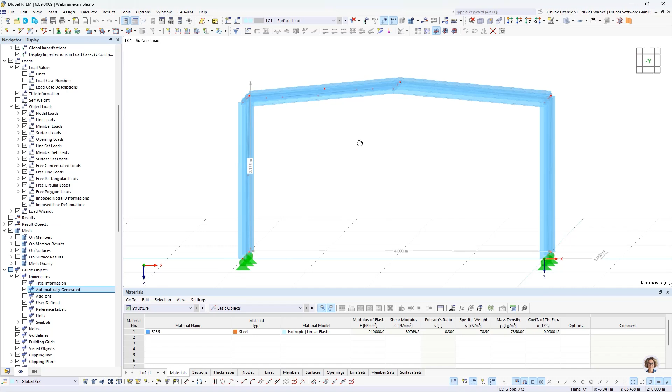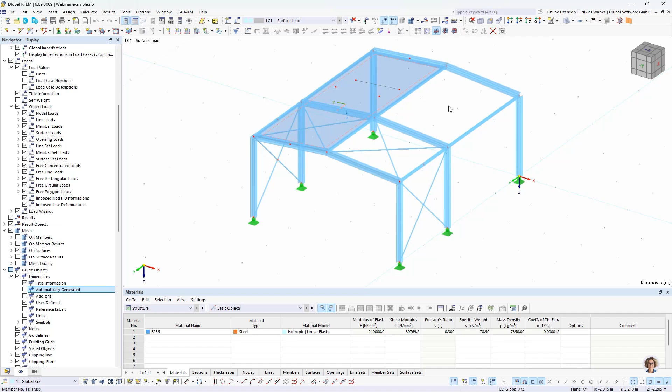As you can see, I already created one surface of one half of the roof, and this is already a load transfer surface. For the second half of the roof, we will model this surface together so that you can have a look at the process of modeling it.

For that, I will choose the option New Surface with the option Select Boundary. Now we are in the surface dialog, and first of all, we have to select our stiffness type.

So this is where the magic happens, because here you can select the load transfer surface, and that's exactly what we want for this webinar.

An alternative would be to select another stiffness type, for example standard stiffness. Then you can create your thickness and your material. In this case, it would be possible to activate the option Activate Load Transfer, where you can consider the stiffness of the surface but also do the load transferation.

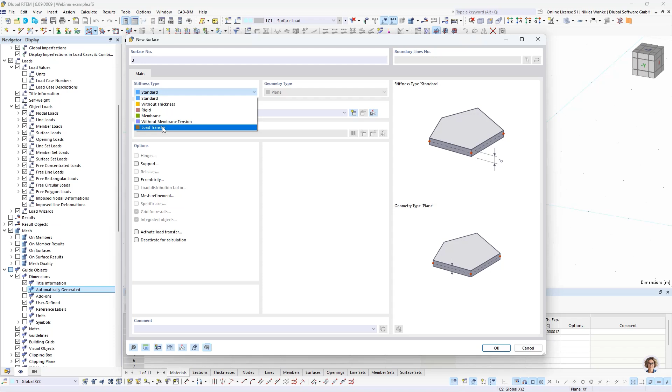But for this example, I would like to choose the load transfer stiffness type, which means we don't apply any stiffness to the load transfer surfaces, just do the load transfer. As you can see, this option is automatically activated in this case.

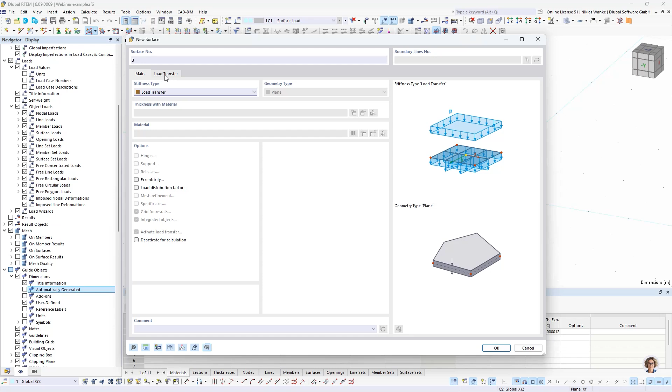Okay, by choosing the load transfer stiffness, we get an additional tab, and this is where we can make all our settings for the load transferation.

First of all, we want to have a look at the categories area, and the first setting is really important. This is the load transfer direction, and basically we offer two different methods of load transfer for the surfaces.

The first method is called isotropic FEA, and the other method is called the stripes method. These two methods work completely different, and we will have a look at both.

But first of all, let us select the isotropic FEA method. I want to give you a small explanation about how this method works, and for that we can have a look at this picture at the bottom right of the dialog, because in this picture it tries to explain how this method works.

So this first picture is what you see in the main model. You have your load transfer surfaces, you have probably a connected member or other connected objects, and you have your applied load. In this case, it's a surface load.

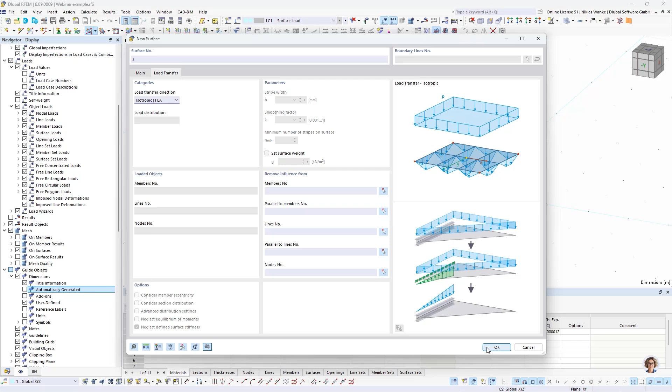But first, let us finish the creation of the surface. So I apply by pressing OK, and then we have to select our boundary lines so that the surface will be created. So that is done.

And now, of course, we also have to apply a load, because without load we would not see anything. Therefore, I create a new surface load. I want to have a load magnitude of 1 kilonewton per square meter to keep it simple, and the load direction should be in global Z on projected area.

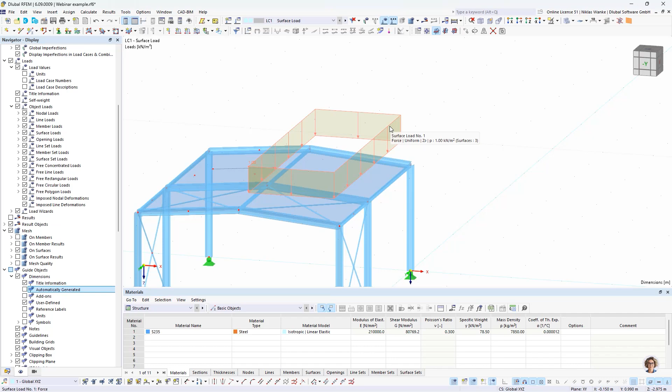We can apply this and select the loaded surface, which should be the right load transfer surface of our roof. Okay, now we see the defined surface load, but that's not the visualization or the load that we want, because we want to transfer this load to the connected members.

And to see how this load is transferred, we have to change the visibility a little bit. So we will go to the navigator display, and you will find the setting under Model, Surfaces. Then you can see there's the option Loads from Distribution Surface.

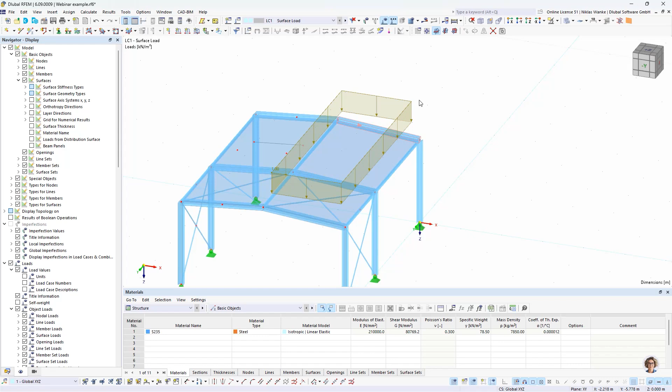And if we activate this option, then we will already see the distributed or transferred loads and not the surface load that we can see at the moment. So I will activate it. And okay, we don't see anything.

Why is that so? Because the submodel, which I talked about, has not been calculated yet. So to start this process, we have to start a calculation of this load case.

As soon as I start the calculation and the solver starts, you will see that there are two separate calculation processes. That's a hint, because the first calculation process is made for the submodel, and after that we do the normal calculation process for our main model.

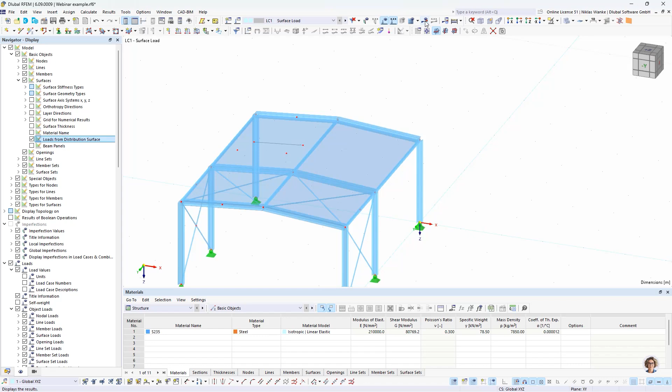So I hit the calculation button, and as you can see, now the mesh is generated for the submodel, and now the static analysis is done for the submodel. If it's finished, we should see loads.

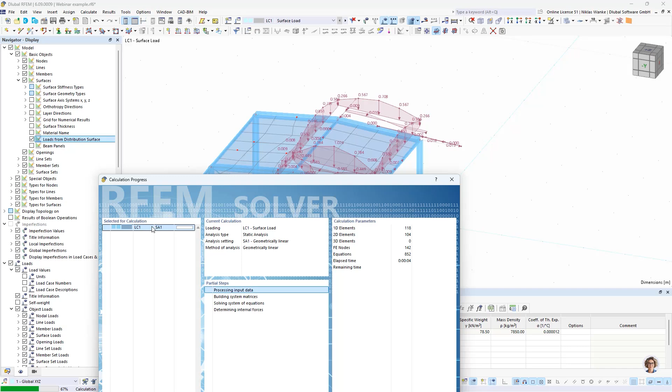That's the case now. And now the mesh is generated for the main model. And now the static analysis is done for the main model, and after that we will receive our results for the main model.

So I think it's clearly visible in the solver that the submodel has to be calculated first, so that we receive these transferred loads.

In this case, also my horizontal bracing has received some loads, and probably that's not the thing that I want. But that's not a problem, because we can simply deselect these members to be loaded.

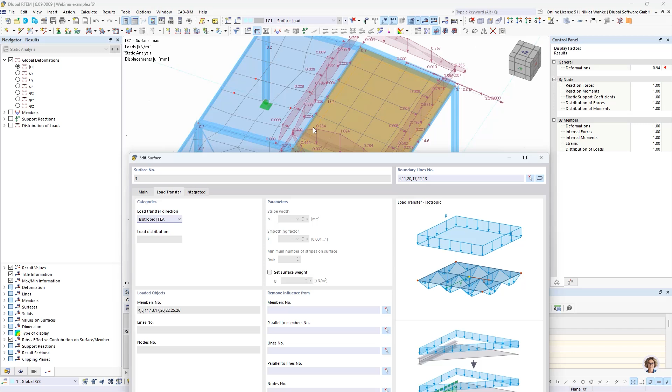For that, we go back to the load transfer settings. Here we can select in the middle part of this dialog which objects should be loaded. By default, all members, all lines, and all nodes which are part of the surface, so these integrated and connected objects, are all loaded by default. But we can remove the influence of some of these objects.

For example, I will choose the members of my horizontal bracing. And by clicking OK, we of course have to calculate again, but then these members won't be loaded anymore.

It's also possible to select one member and all members which are located parallel to the selected member, and then remove the influence from all these parallel members. Same is true for the lines, parallel lines, and for the nodes.

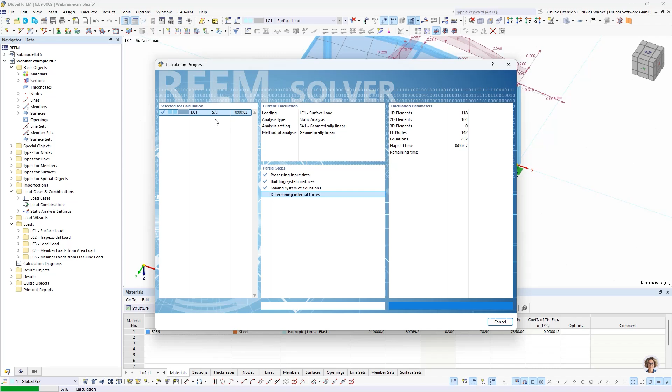Okay, let's calculate this again. Here we see again that it's calculated two times: first time for the submodel, and second time for this steel hall model. That was the first time, and now the steel hall is calculated. And now it's finished.

Okay, so now we received our transferred loads. I can also switch back to the original load, which is the surface load, and switch back to the transferred load. In this case, we only have member loads.

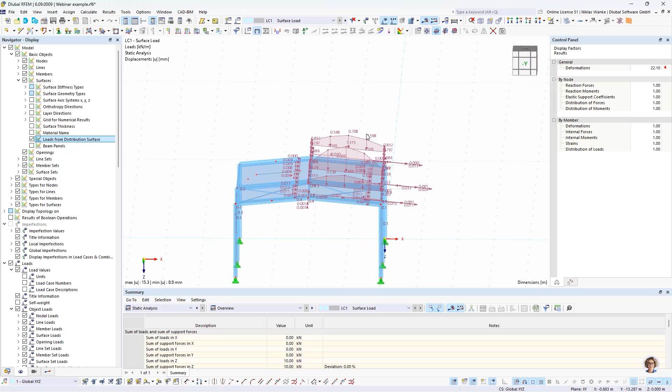The main load is a vertical load as expected, and we have some small effects which result in horizontal loads, but most likely you don't have to pay any attention to these loads because they are really small, like 0.001 or 0.02.

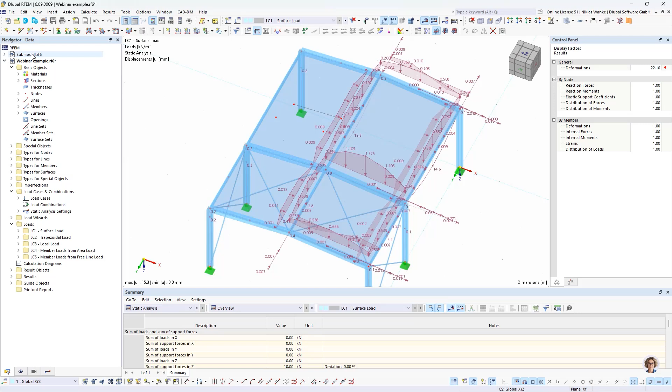Okay, I would like to show you the submodel as well, and I prepared this in a separate model of RFEM6. So I just created the submodel of this one load transfer surface. As you can see, we also have the roof pitch, and we have the surface load on the surface.

And in this case, the members, as I said, are now modeled as fixed supports. The definition of the surface is a bit special, so it's not a complete rigid surface, but a surface with the stiffness type standard and a defined stiffness matrix.

So let us have a look into the stiffness matrix. We will see that the different stiffness coefficients are set to a relatively high value, like 1e+10 or 5e+9, or maybe here also 1e+11. So this is a really high stiffness, but it's not a complete rigid surface. It still has a finite stiffness.

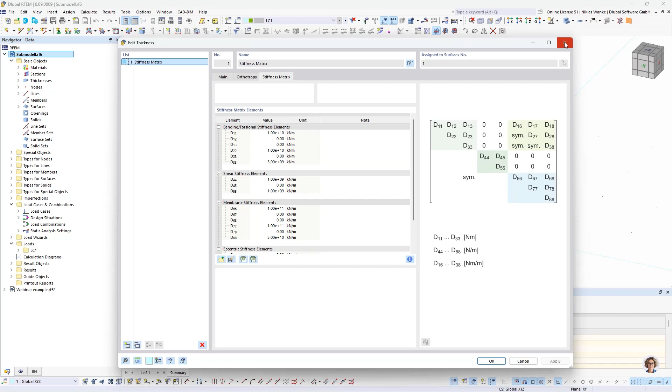The reason for that is because this leads to a better result, or a better load distribution. So that's why this load transfer surface is set to this stiffness in the submodel.

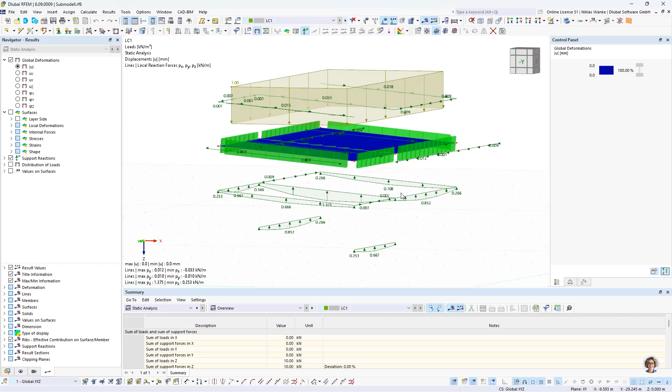And if we calculate the system, then we will receive the support reactions of these fixed supports, and this will be exactly the load which is applied in our main model. So for example, we can remember this value here, which is the peak value of the middle rafter.

So in this case, we have 1.375 kilonewton per meter. And if we switch back to our main model, we will find exactly this value, which is 1.375 kilonewton per meter. So yeah, with that, I think we have proved that it is the same.

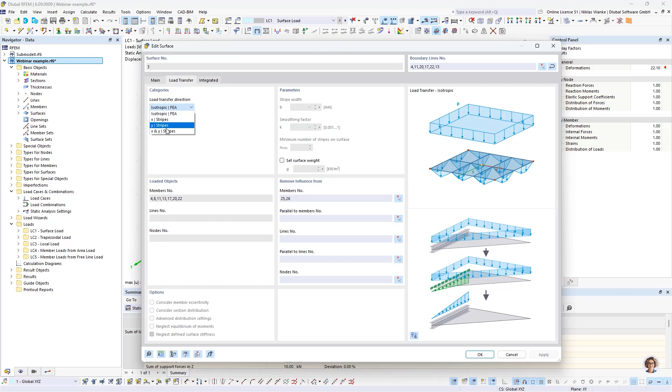Okay, so let's go back to the definition of the load transfer surface. And this time we will have a look at another method, which is the stripe method.

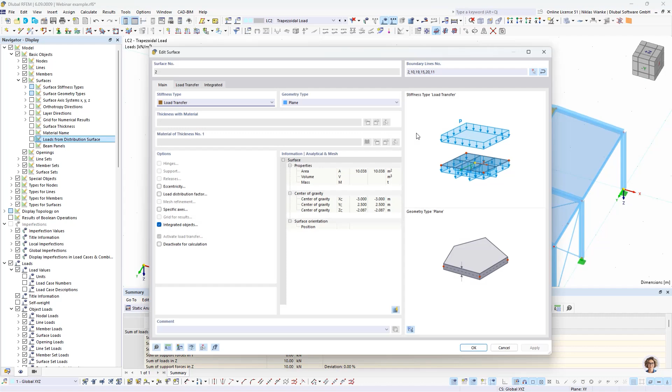Therefore, I will go to a new load case, which is the second load case. And here I defined a trapezoidal load for the left side of the roof. Let us have a look at the load transfer surface, which I have already defined.

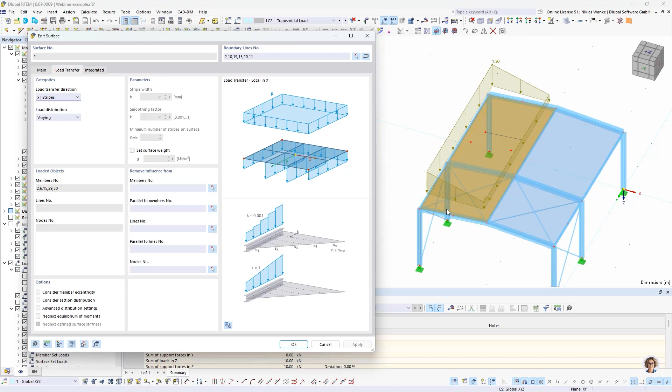So we go back to the tab load transfer. And in this case, we see we have defined X stripes. And this means that the surface, which we see here, is divided into many, many stripes along its local x-axis. So if we hover over with our mouse, we can see, okay, the local x-axis is located in this direction. So it means that the surface will be cut or divided into many stripes, like I am showing with my mouse. So in this way.

So you can imagine, like, if there would be many single beams which are lying in this direction on the roof. And every of these beams or every of these stripes is loaded with this trapezoidal load. And always if such a stripe cuts a member, like for example these rafters or also the horizontal bracing, then these members will be loaded by the stripe.

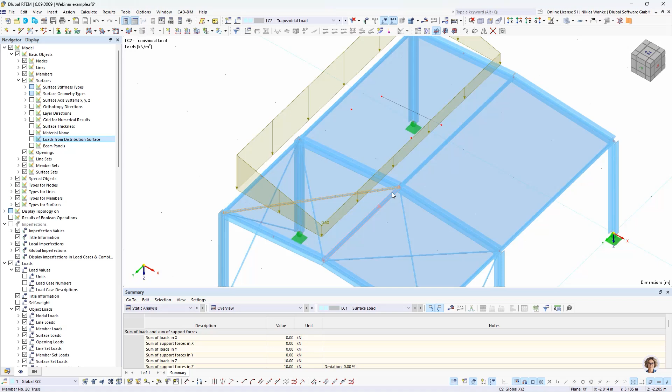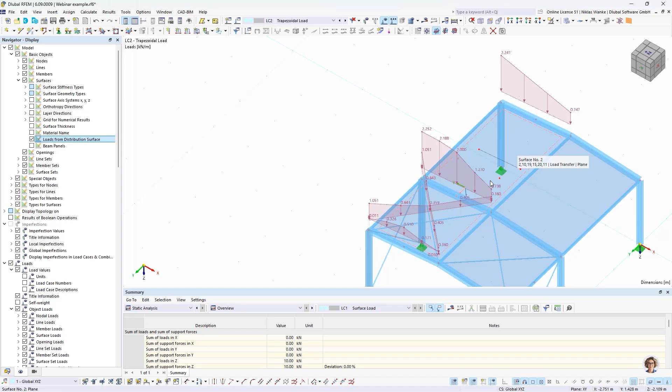So I will go on. No, I will first of all select the loads from distribution surface so that we can see the result of the load transfer. And as we see now, okay, the horizontal bracing is also loaded and our rafters. What is not loaded is the purlin of the rim and of the middle. And the reason for that is because the purlin is completely parallel to the stripes direction, so it does not receive any load. If we change the stripes to Y stripes, then of course the purlin should be loaded and our rafter should not be loaded anymore.

So I will change it and apply. And now we see, okay, the purlin is loaded, but rafter is not loaded anymore. So these are the two options that you have to divide the stripes in X or Y direction. And the third possibility would be to mix these two stripe directions. So in this case, you have X and Y stripes. It's basically like a mix of the two methods. So if we select it, you will see that now all members, regardless of their direction, are loaded.

Another option that comes with the stripes method is the load distribution. Normally it's set to varying, but it's also possible to set the load distribution to uniform, and in this case you will always receive a constant load distribution on any object. So if I set it to uniform, we will see that this linear load distribution will change to a constant load distribution. In some cases, this can be an advantage to keep the system a bit more simple. Maybe also to prove it easier if you calculate it by hand. But of course, the load distribution varying would always be the more exact method. Okay.

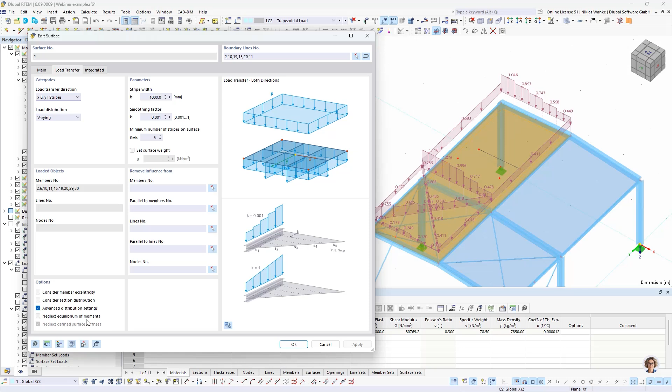Okay, and one last option is the option neglect equilibrium of moments. By default, the setting is deactivated, which means that the equilibrium of moments is considered. And I can show you that in my third prepared load case. And here I defined some local loads on our load transfer surface. I have two nodal loads. I also have a free line load and a free rectangular load.

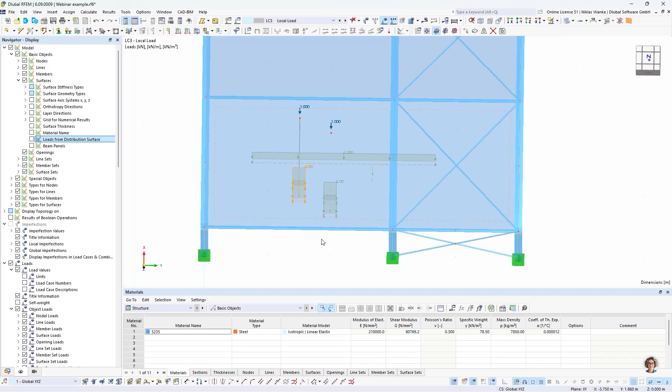This could happen if we have, for example, air conditioning on the roof, or if there are some pipes which are connected with the roof. So this could be cases where we have such types of loads on our roof. And of course, it's also possible to transfer these loads which are applied on the surface to the connected objects like these members. Normally, the equilibrium is considered.

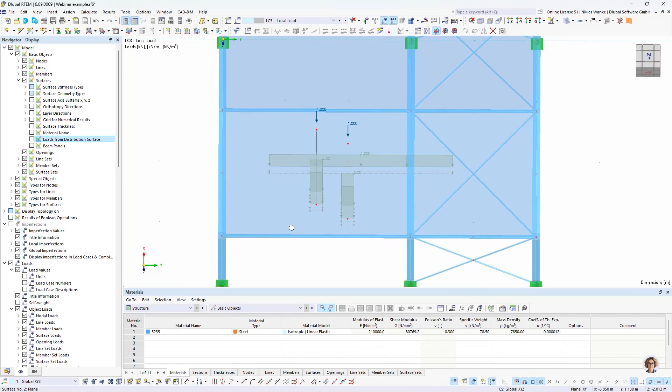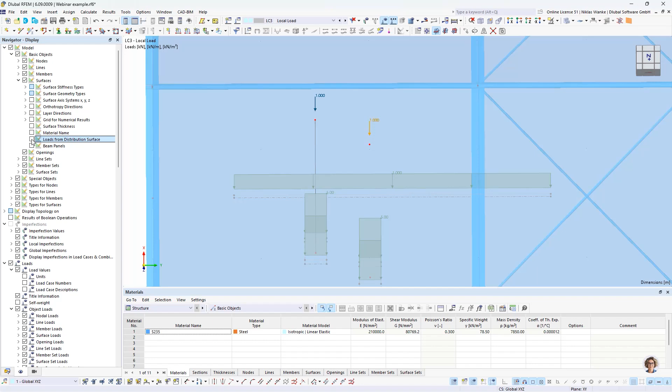And as I already explained, 2/3, which is the value 0.667, go to the right rafter, and 1/3 of the load, which is 0.333, goes to the left rafter. And equilibrium of moments is considered for the transferred loads.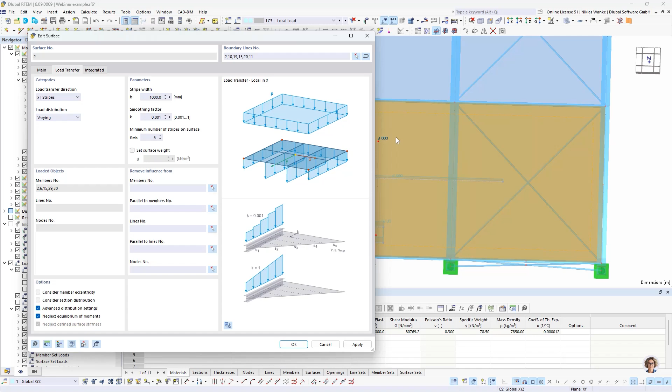Same is for all other types of loads. But now, if I activate the option neglect equilibrium, then the equilibrium does not matter anymore, so it's neglected. So what does it mean in detail? It means that now you can imagine like there's a cut done in the middle of this span between the left and the right rafter.

And every load that is located on the left side of this cut will be transferred to the left rafter. And all load that is located on the right side of the span will be transferred to the right member. This would mean, for example, that this free rectangular load, which is completely located on the right side of the span, will be completely transferred to the right member. So that's different to the case before.

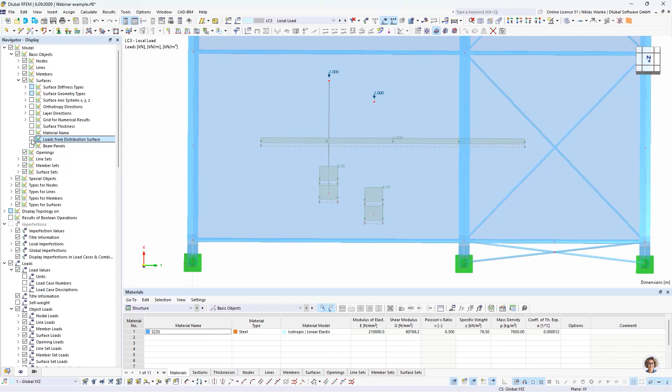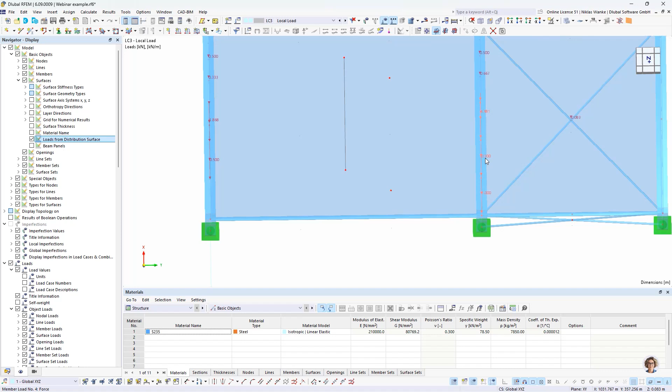If I activate the load from distribution surface, we will see this. So now we have the complete load on the right rafter of this rectangular free load. And on the left side, we don't have any load in this case. If the load is located completely in the middle, then it will still be like before. So we have half on the right and half on the left.

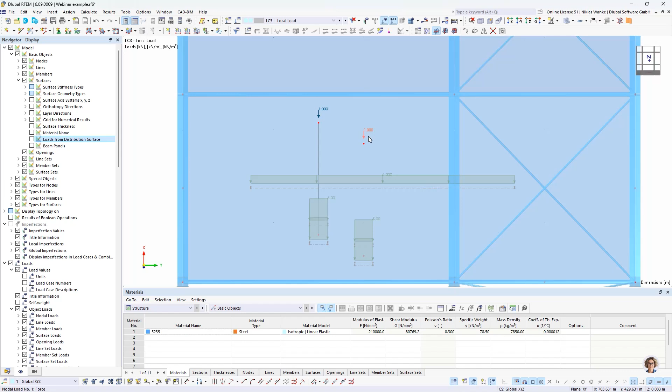And there's also one special case, because for these loads, which are nodal loads, the equilibrium is always considered correctly, also if the option is activated. So also for this load, which has eccentricity to the middle of the span, the loads are still distributed 2/3 and 1/3. But for all other loads, the equilibrium won't be considered anymore in this case.

Okay. I just remembered one thing that I would like to show you again. By now, we always only transferred the surface load on this load transfer surface to members which are connected to the surface. But I would like to show you that it's also possible to transfer it to lines or to nodes, like shown here.

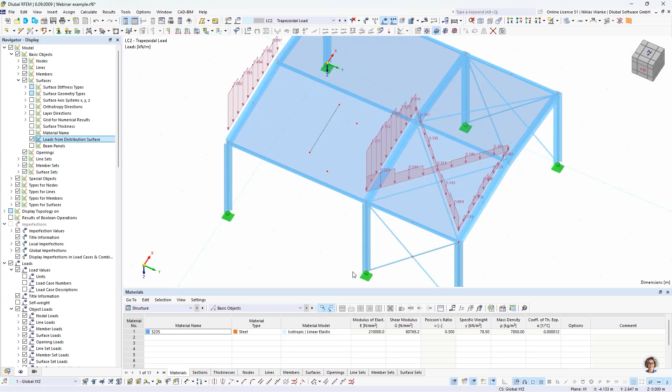Now it's not transferred to these objects. The reason for that is because these nodes and this line are no structural objects. It's just geometry, and it does not have any stiffness or something like this. So that's the reason why the loads are not transferred. But if I, for example, put such a nodal support on this node, then it will instantly also receive a load.

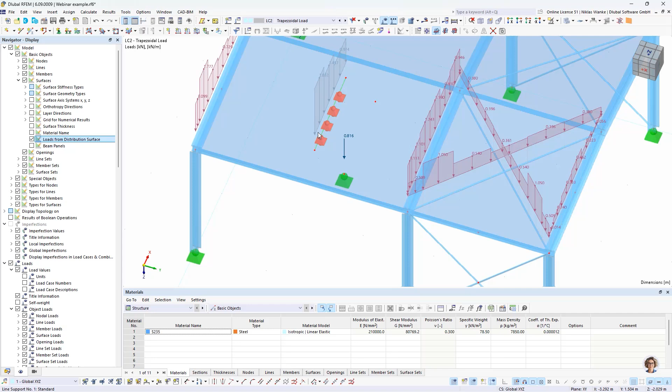Same is for the line. I could put a line support there. And then we will see, okay, now also the line has some loads transferred to it. Of course, that's also possible, for example, if you have a wall which is connected to the load transfer surfaces in this line, then also the wall will be loaded. And same for the nodes. If we put a column on this node, let me do it really quick, then also this column, of course, has a stiffness and will be loaded.

One thing you have to keep in mind is that only the load of the stripe which the node or the line is located in will be transferred to the column. This means if you select the stripes method in this case, it really depends on the stripe width. Now we have a very big stripe width. We only have 5 stripes. So the column is getting a relatively high load.

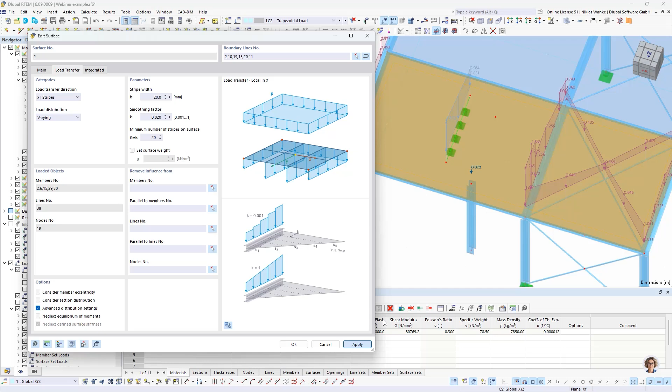But in the normal default setting, let me change it back to the default setting, we only have a stripe width of 10 millimeters. And this means that the column will only receive a really small load. If I press apply, you see now it's only 0.02. And for example, if I double the stripe width, we will receive the doubled loading, which is 0.04 now. So that just means that the stripe width has a big influence on the loads on columns in this case. This is why I would recommend to use the isotropic method if you have some structure like this.

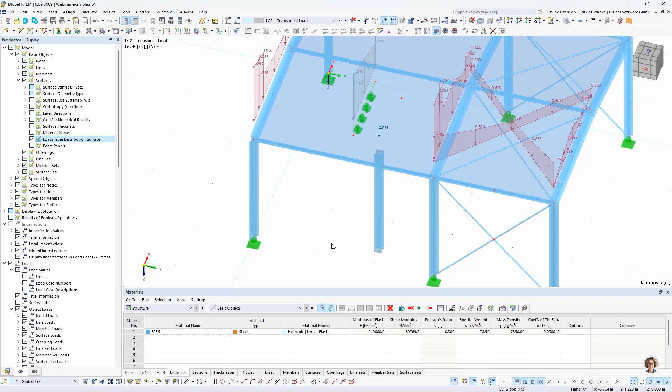Okay, let us remove the column and the line support, because in this case it would not make much sense to have a column here. And now we are back to the default system. One last thing that I would like to show is that load transfer surfaces can also be used for other geometry types. So you don't necessarily need a plane surface. You can also use curved surfaces like quadrangle. Load transfer works the same, and I think that's a really handy feature and a big advantage.

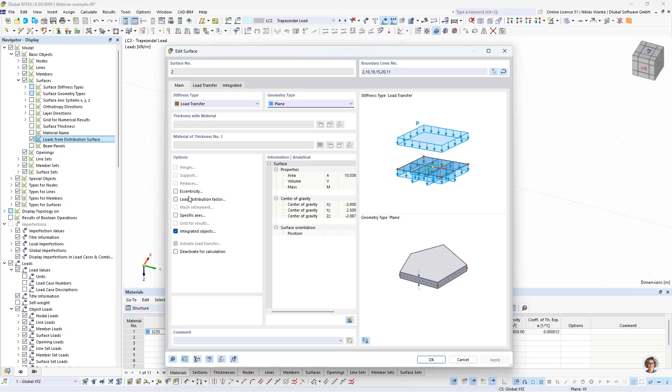And the other thing, and that's basically the last thing I want to explain for the load transfer surface, is the load distribution factor. That's an additional option for the load transfer surface. And if you activate it, you can define load distribution factors if you want.

So by changing the factor for some members, for example, I can say, okay, this member should receive a higher distribution factor, and maybe we choose 1.3 or something like this. Then we will see that the transferred load will increase. So I have to apply it, of course. And now you see the load has gotten bigger.

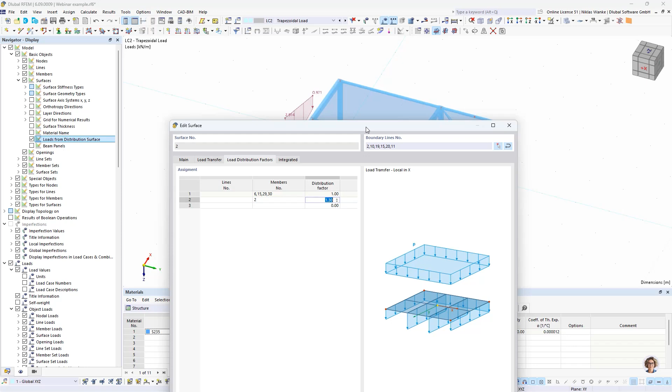Be careful a little bit with this function, because if you increase or decrease the distribution factor, you will also increase or decrease the sum of the loads. So you will receive a higher surface load or a higher load at all. This means that you increase the absolute values of this load, and it's not relative to the sum of the loads.

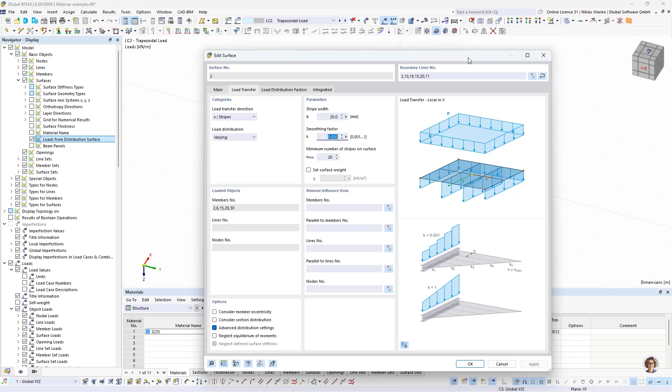Okay, but it's, in my opinion, also a really useful feature if you want to kind of manually have an influence on the load transferring. Okay, that's already everything I wanted to explain for the load transfer surface.

And as I said at the beginning, we also have two other points that we want to have a look at today. And these are the two load wizards, member loads from area load and member loads from free line loads. To show that, I will switch to load case 4 that I already have prepared. I want to use just this load case to show you the first load wizard, member loads from area load. For example, we could imagine that we want to apply member loads from an area load, which is the result of a wind load on our steel hall wall.

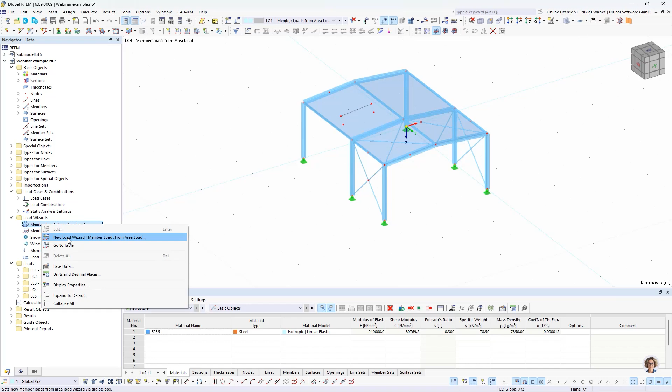Therefore, we can create a new load wizard. We can do this by double-clicking here or by right-clicking and selecting the option New Load Wizard. Now we see the dialog for the definition of the member loads from area load. This load wizard has an advantage, and the advantage is that we don't have to manually define our surface like we had to do for the load transfer surface. So we don't need any surfaces at all.

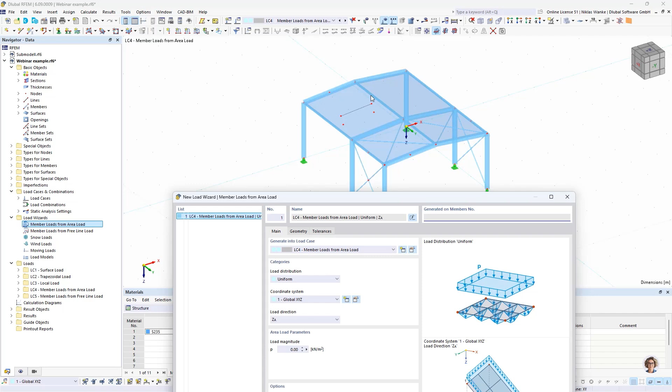That's especially an advantage if you are working with RSTAB, because there you don't have any surfaces available, and you can still use the load wizard member loads from area load. The disadvantage of this load wizard is that you can only apply surface loads. For the load transfer surface, you have seen that we can also apply, for example, nodal loads and free loads. So we can apply every type of load to the surface. For the load wizard, only surface loads.

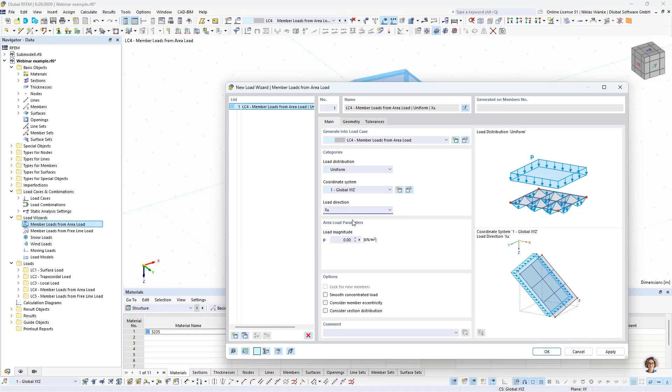Okay, let us generate our load. We want to generate it in load case 4, and we want to choose the uniform load distribution in global X direction. So I choose global X. And the load magnitude should still be 1 kilonewton per square meter to keep it simple. And there's one thing we have to define to finish the input for this load wizard, and this would be the geometry of our surface load.

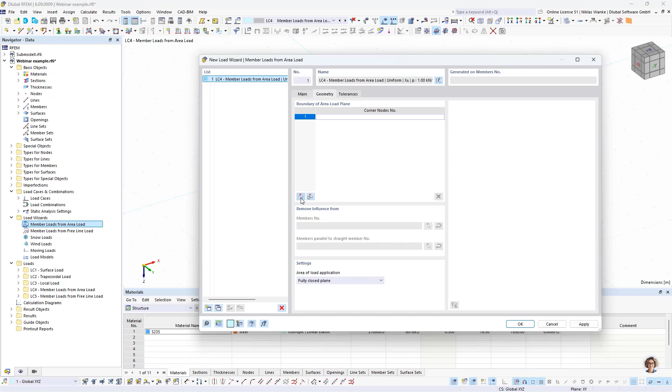Therefore, we can pick our corner nodes for the area or for the surface we want to apply the load on. And I think the easiest way would be to pick the nodes in the main model. So I select the corner nodes here of our wall of the steel hall. And now we are ready to go and can press OK. And that is the result. Normally, or by default, we still see our defined surface or area load.

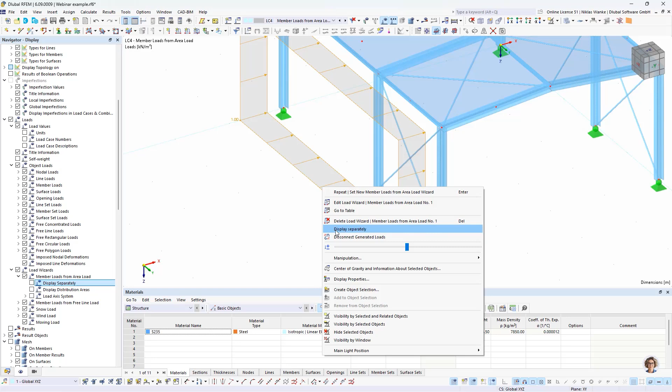But again, it would be interesting to see the transferred member loads, because these are the real loads that are considered for the static analysis. To achieve this, we go back to the navigator display, scroll down a little bit to load wizards, and then member loads from area load. And here we can choose the option display separately. And now we see the load distribution on the members. Alternatively, you can also select the load wizard load, right-click and choose display separately. It's basically the same.

Okay, now we see the loads, and maybe you could wonder, okay, why is there such a corner here, and here's also a little corner on this load. I cannot explain why this is happening. And in this case, it's really useful to have a look at the distribution areas of this load wizard. And this is possible to show in RFEM 6, and I think it's a really powerful or really cool feature. And to achieve this, we have to go to the navigator display and select the option display distribution areas.

So I enable this, and yeah, I still don't see anything because I first have to select the load wizard that I want to show the load distribution areas. So now I select it, and we get a really nice overview of the distribution areas. And by seeing that, it will be a little bit clearer why we have these peaks or these corners here in the load. Yeah, now it makes much more sense, and it's a good visualization option in my opinion.

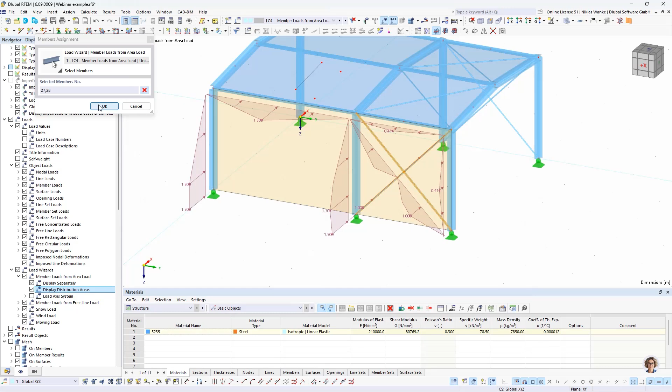The smooth concentrated loads option, I will show this in some minutes, but first of all, we will switch over to the geometry tab. And here we have also the option to remove the influence for some members. It's also basically the same like for the load transfer surface. So for example, if I want to remove the influence for the horizontal bracing, then I can do it with the selection. I can apply it, and then we see, okay, now the horizontal bracing is not loaded anymore, but the other members receive a slightly bigger load instead.

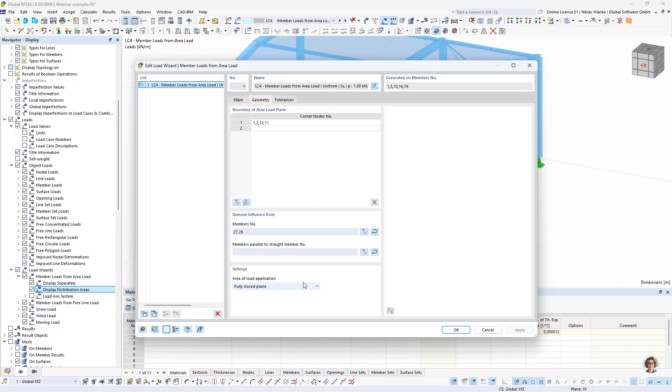Then there's also a really powerful setting, in my opinion, and you can do many things with it. And this is the area of load application. By default, we apply the load on a fully closed plane. This means that this complete plane has an area load, which has to be applied on the members. The second option would be to only have an empty plane and the load only on the members. So let me choose this option and apply it.

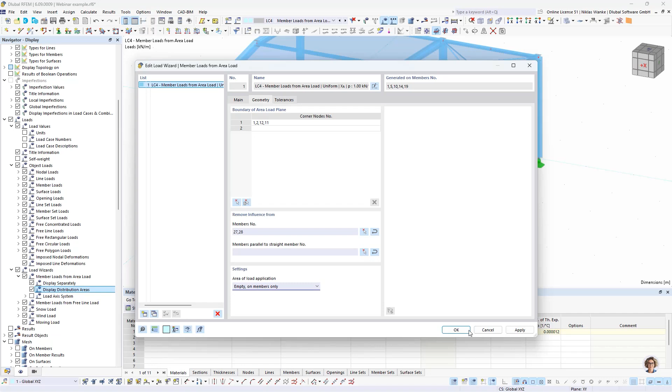First of all, we see, okay, the loads are getting much smaller, and that's because now only the surface where we have our members is loaded. For example, you can imagine that this hall is open, so it has no wall, only the columns, and we have a wind load. So the wind can flow through the hall, and it only creates wind pressure on the members. So this would normally be the use case for this option.

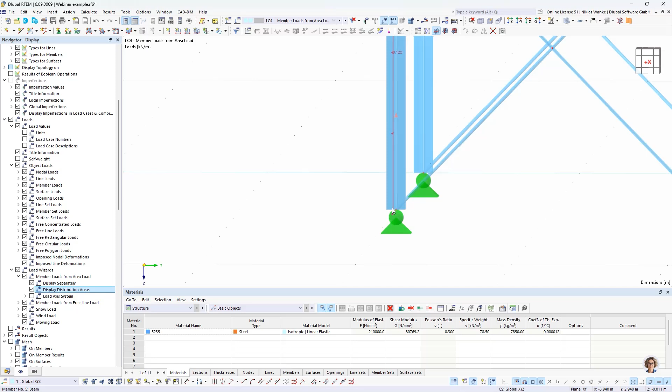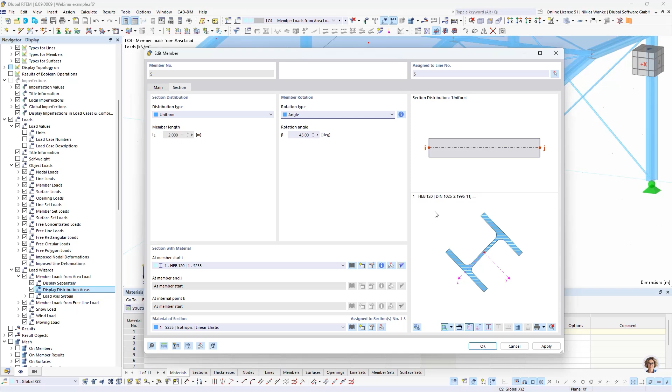And what is really cool about it is that the exact surface of the section is considered. This means that the columns with the bigger cross-section also receive a bigger load than the purlins with a smaller cross-section. And what is also considered is the rotation of the member. So if I, for example, define a rotation of 45 degrees, then we will have a bigger load distribution area for wind loads, for example. And as you can see, the load will increase to 0.17 kilonewton per meter. And with the unrotated member, it's only 0.12.

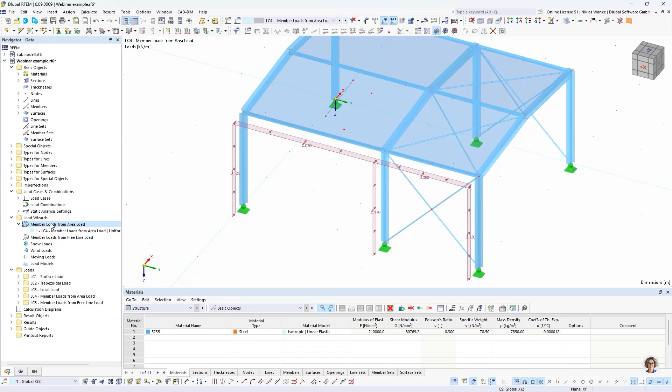So that's a really powerful tool, in my opinion. And especially for wind loads, this can be really helpful, for example, for truss systems and so on. Okay, to show the other functions for the load wizard member loads from area load, I would like to create one more load wizard. So basically, it's possible to create as many load wizards as you want in the same model. It's not limited to one. So I will create a new one.

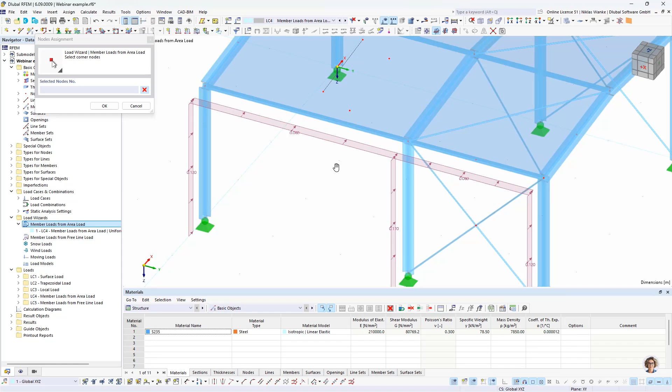And this time I want to have global load direction in ZP direction with 1 kilonewton per square meter. And I will pick a geometry which is a bit special. So I pick, first of all, the corner nodes of our left side of the roof. But here I will do it a little bit special. So I pick this middle node of the surface and then I complete the surface.

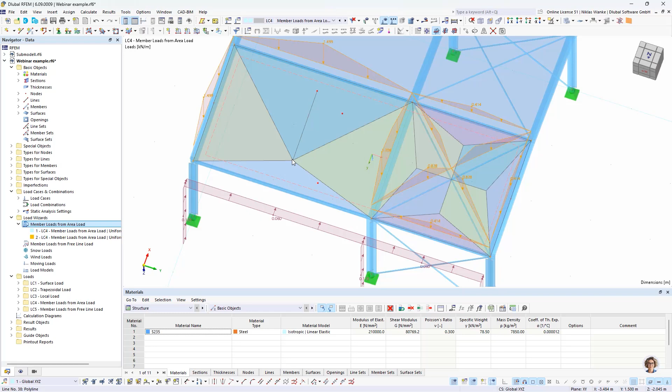So now we see that this area does not receive any loads. And we also see that the purlin, which is outside of the load distribution area, does not receive any loads. This means that only members in this plane are loaded.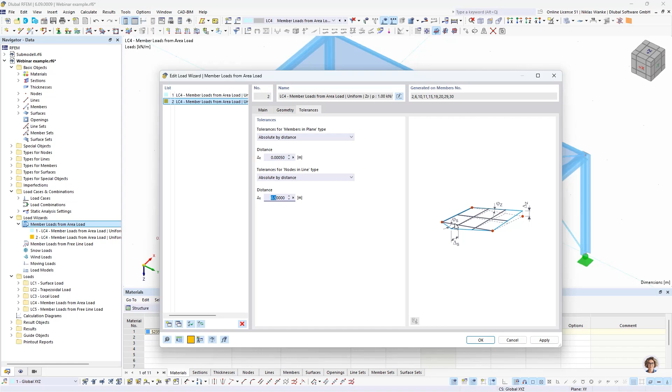But we can modify this a little bit by modifying our tolerances. For example, I could say I want a tolerance of delta S of a really big one, like 0.5 meters. This is already a really high tolerance. This would mean that also members which are located 0.5 meters outside of the plane will be considered as well. So let us apply it.

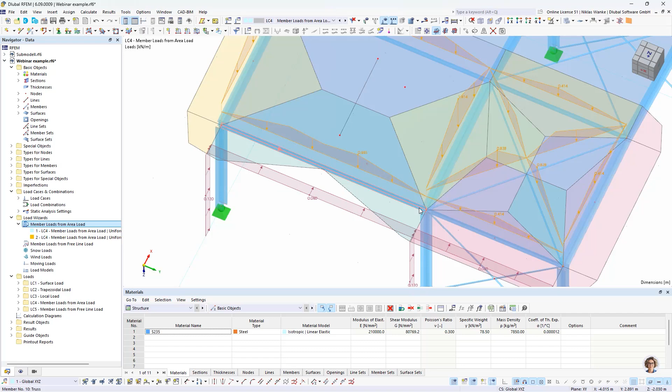And now we perfectly see again on this load distribution area that we have such a radius of 0.5 meters outside of our predefined plane. This means that every member which is located in this tolerance area will also be considered for load distribution. So in this case, this purlin is located inside of the tolerance area, which means it receives loads.

If I lower the tolerance a little bit, for example to 0.3 or maybe 0.4, then we can see that a small part of this member is outside of the tolerance area, or of the load distribution plane. And we see that this part of the member is not loaded anymore.

In this case, we have such a bit strange nodal loads on the member. This is caused because we have kind of a concentrated load in this location. If you don't want to have these nodal loads, you can activate the option smooth concentrated load. That's exactly for this case. If you receive some loads like this, you can, if you want, smooth them, and then the loads will be considered within the member load.

So the member load will increase a little bit, but the nodal loads will be removed. It's up to you. You can do it if you want. Probably it will be a bit of an advantage for your system. You can decide if you want to apply it like this, or if you want to consider this as nodal loads, like it's done by default.

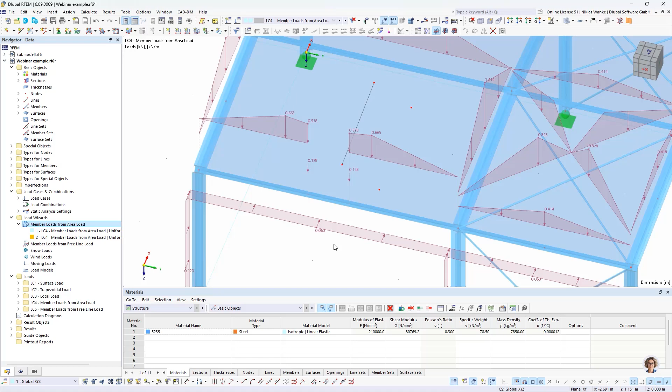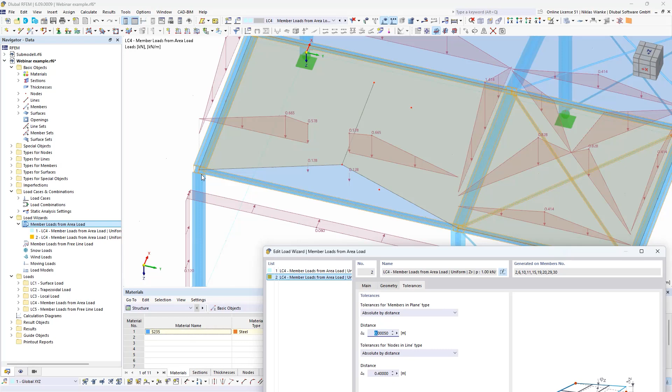I only talked about the second tolerance option, but there's also this first one, and this is for members which are out of the plane. So for example, if I would have a member which is a bit delayed in the global Z direction, so it's a little bit higher or lower, so it's not directly in the plane that I have defined, then we can change this tolerance to a higher value to also consider these members outside of the plane. So these are basically the two tolerance options that we have available.

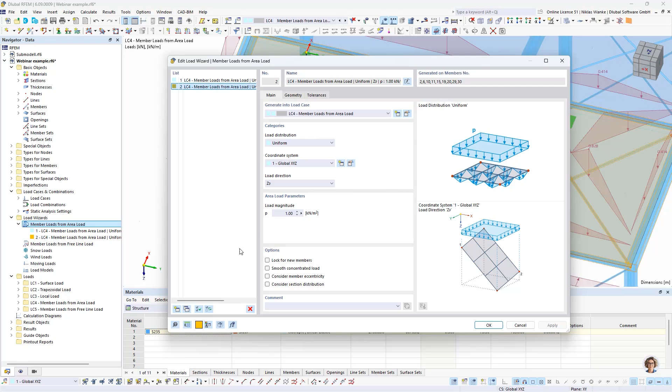I think that would already be everything for the member loads from area load wizard. So we can go to the last one, which is the member loads from free line load wizard. Let us create a new line load. As you can see, it's relatively similar to the first load wizard. The difference here is that we don't apply a surface load, but we apply a line load, as you can see on this small image.

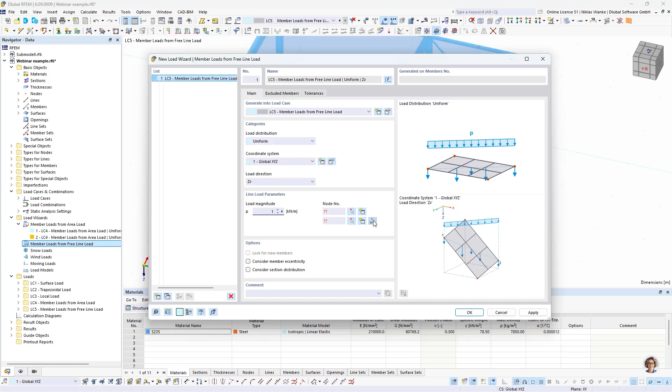For that, we again have to say we want to define it in load case 5. We want a uniform load distribution in global Z direction. Of course, we also have defined the load magnitude, and now we need to define the start and the end node of this line load. I think the easiest way to do this is by picking it in the model. Best way is by pressing this button, because then you can select both nodes at the same time. So I picked the first and the last node.

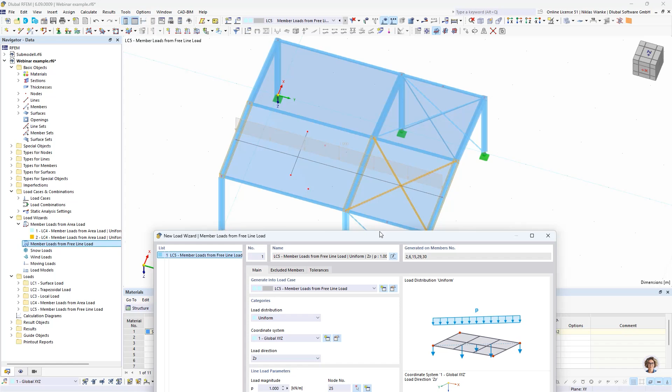You could imagine, if there is a pipe or something on the roof, or technical equipment, this could be the use case for such member loads from free line load wizard, because if you have, for example, a pipe which goes from start to end of this hall, then it has a constant load over its length. But it will be connected only with the members probably, and not with the surface. So this would be the perfect use case for this load wizard.

I don't have to explain too much about the options because it's exactly the same as for the load wizard before. We can also lock this for new members so that they won't be loaded, and we can also consider the member eccentricity and the section distribution if we want. Let's apply it.

And also here we can say, okay, display separately. And then we see all our punctual member loads that have been transferred to the members. Basically all members that are cut by this line are considered for load distribution.

But also here you can define tolerances. For this load wizard, only the second tolerance is relevant, so the first one does not have any impact. But if you want to add a small tolerance, you can change this value, meaning that members which are not directly cut by this imagined line can also be considered.

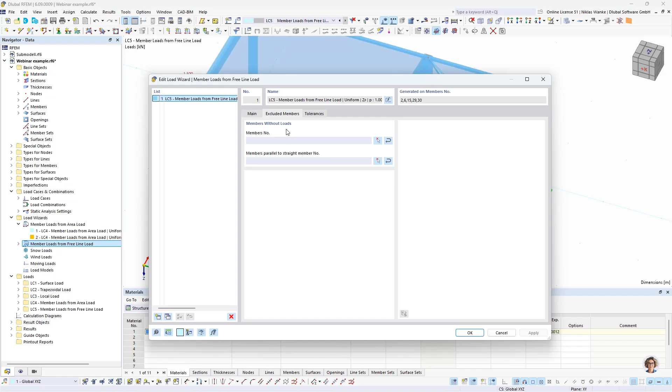And as you are probably already used to it, you can also select that some members should not be loaded. So we can, for example, say like always, we don't want to load our horizontal bracing, and apply this. So now the loads are only applied on the rafters.

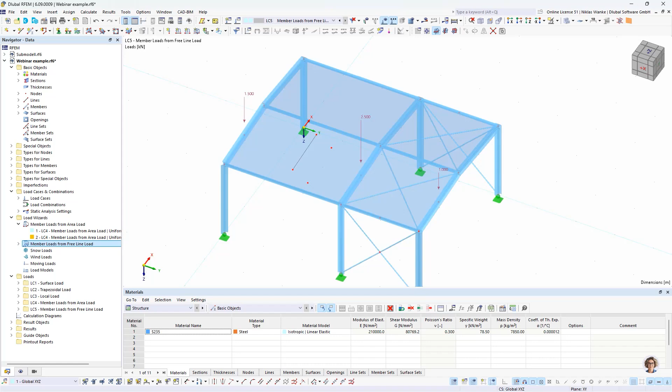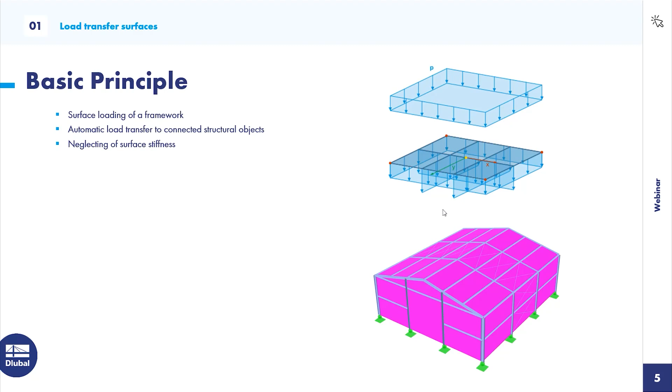Okay, so that should be it for all three possibilities of load transfer. And one last thing that I would like to talk about with you is the small outlook for planned features in the future. For that, I will switch back to the PowerPoint presentation and go to the next page. It's not that much which has to do with load transferation, but there are two things that we are planning at the moment.

And the problem, or the task, is that we have horizontal loads on the walls, and these loads have to be transferred first of all to the walls, from the walls to the ceiling, and from the ceiling to the columns. So these are multiple steps for load transferation, and for that we need something like hierarchy levels, so that we can define a priority which load transfer surface should be considered first and which one should be considered next.

For the building model, it's kind of clear how this has to be done. In this case, the walls have hierarchy 0, so load is distributed on the walls. We calculate the support reactions of the walls and apply it as external loads on the ceiling. Then these external loads of the ceiling are transferred back to the columns. That's the way how it works in the building model.

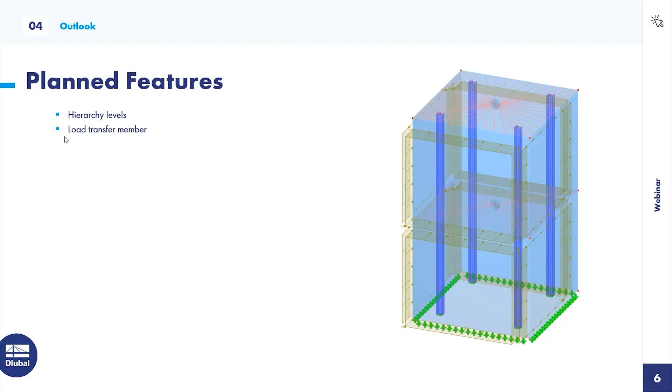Okay, now I have said everything from my side, and I would give back the speech to my colleague Andreas.